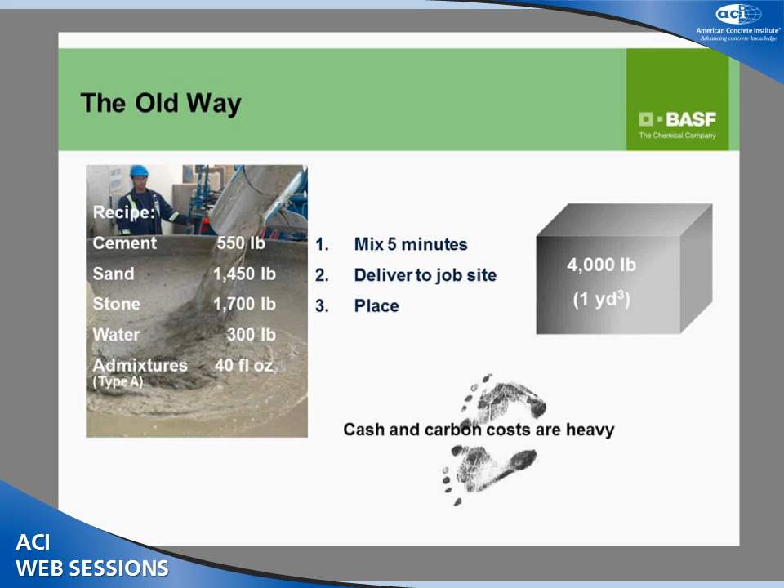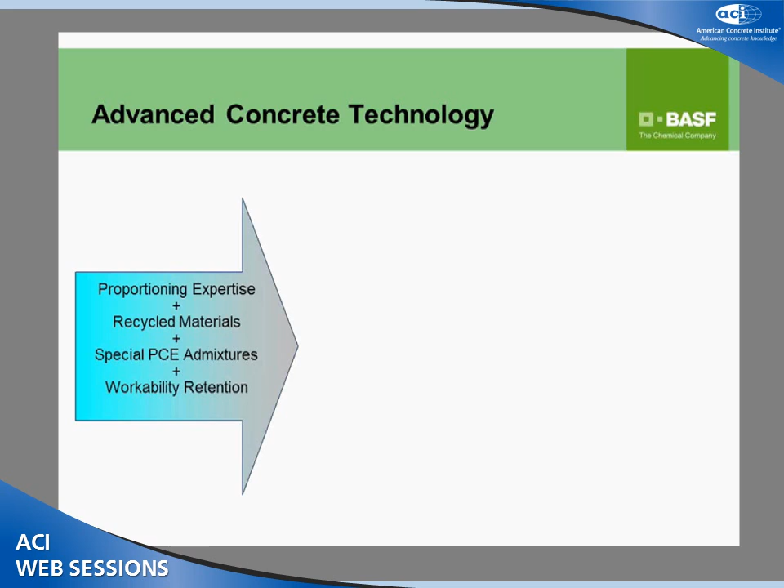The only problem is, if we follow that recipe, there's a cash and a carbon, or environmental, cost to doing that. There are advanced concrete technologies that are moving us to more sophisticated and lower ecological impact mix designs. We're able to do this through proportioning expertise, the use of different types of recycled materials than we've used in the past, special PCE admixtures, and workability retention.

It's depicted on this slide: if the world we used to live in was concrete that was expensive to produce but had low to moderate durability, low to moderate workability, or high porosity, somewhere in this world we can move up into this area—lower cost concrete with better workability, better durability, and lower porosity. The thought of doing that in the past was a little bit unthinkable.

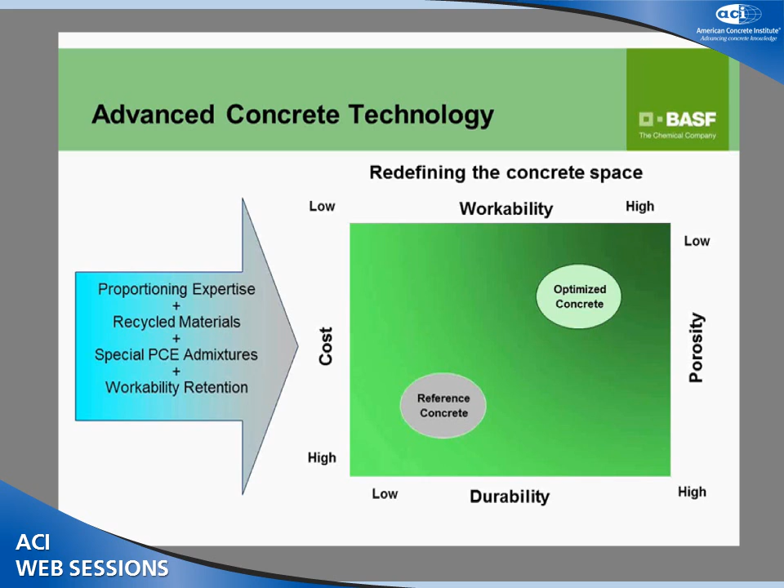How can we make concrete better and cheaper, and in the end also with a lower environmental impact? So ERA started to talk about this a little bit—the replacement of large amounts of Portland cement.

With different ingredients, whether they're things we're typically used to replacing Portland cement with, like fly ash and slag, or some more exotic things and combinations, like out-of-spec silica fume, metakaolin, cement kiln dust, or even limestone fines or aggregate fines.

Mixes can be proportioned using all of those ingredients, and it isn't one magic recipe. There isn't a recipe that fits all.

When we're looking at designing mixes for performance and low environmental impact, you have to look at the mixes individually, and you have to determine what's the type of mix, what's the workability and engineering properties, and then look at what region we're in and what materials are available.

Is there fly ash? Is there metakaolin? Is there silica fume? Is there limestone fines, for instance? Then determine the reactivity of these materials and match them with the right novel chemistry.

I think Era did a great job this morning talking about some of the novel chemistries and the molecules of these PCEs. But to match the mix design with the reactivity levels of the recycled materials with the right chemicals, and then use expertise in gradations and custom software and proportioning expertise to come up with specific optimized concrete mix designs where cash and carbon costs are minimized.

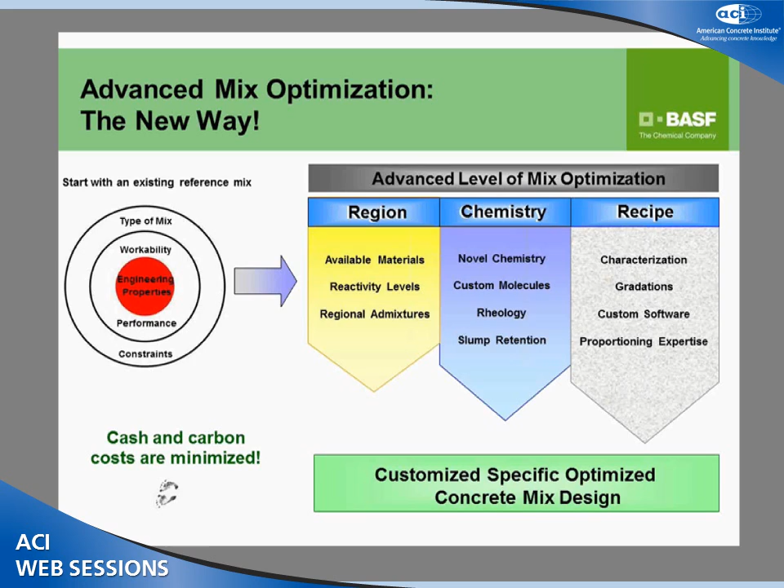So you start to hear about 50, 60, 70% replacement of the Portland cement with combinations of these different materials.

A question comes to mind: we know how to measure performance of concrete, right? We know how to measure compressive strength, modulus of elasticity, and setting time, so we can make sure these mixes containing high amounts of recycled material perform. But how are we sure, and how do we measure the environmental impact of these different concrete mix designs?

When doing so, you really need to take into account three different pillars. The first is economy: is it sustainably less expensive? Second is ecology: is it a lower environmental impact? And third is social responsibility: is it just the right thing to do? When measuring the environmental impact of concrete, you should look at all three of these pillars.

We always hear about buzzwords in the industry, in our society - lower CO2 emissions, lower carbon footprint. We hear those all the time, but I don't think we always understand what that means.

In this case, an analogy is a more fuel-efficient car. If you make a car lighter, more aerodynamic, lower rolling resistance, add a battery-assisted hybrid, and lower air conditioning requirements - that sounds great, right? Let's party, it's a great achievement.

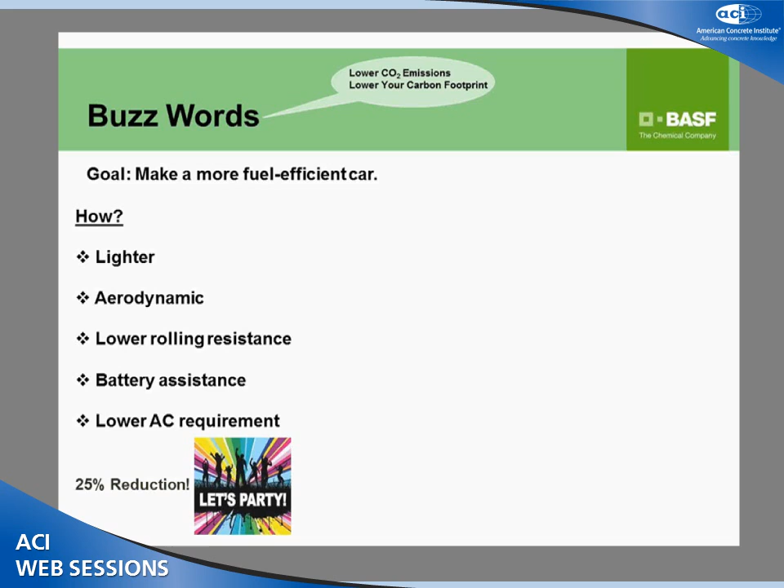But really, you need to go back - and this is just to make a point related to concrete - and look at what have you really accomplished. If it's lighter because of certain plastics, or aerodynamic because of different alloy systems or innovative rubbers, a supplemental engine, or reflective paint - those things should be considered in an environmental impact of a car.

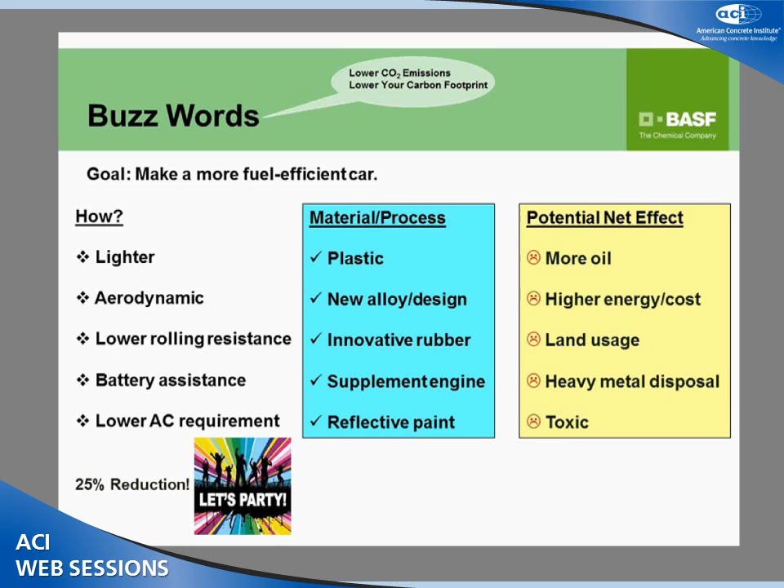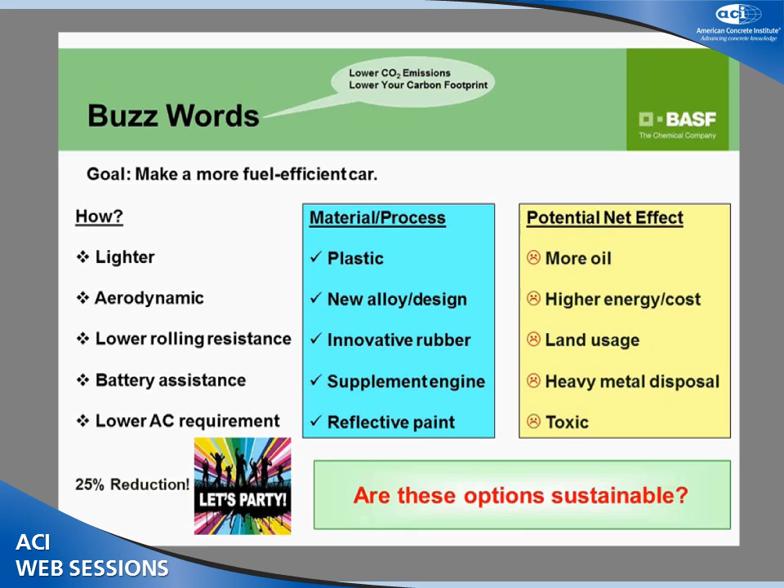So who knows? We're not saying this is the case, we're just saying you really don't know how much more environmentally sound this car is until you go back and quantify: is there more oil being used because of the plastic? Is there higher energy because of the alloys? Right down the list - are we using land to mine the rubber, heavy metal disposal, or toxicity? The whole point is you can't tell on the surface whether something is environmentally sound or if these are a good sustainable choice.

So now the analogy moves towards concrete, and we keep hearing recurring themes: reduce cement content, more supplemental cementitious materials, and use recycled concrete. In these mixes, which would be more sustainable? By sustainable we mean lower impact on the environment, a good impact on sustainable construction.

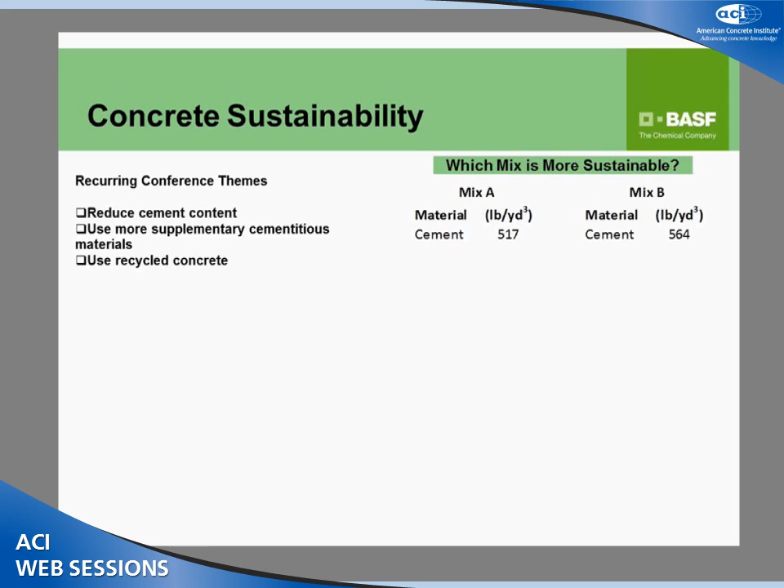So if you had a mix with 517 pounds of cement or 564, most people say well, more cement, that one is probably less sustainable. Well, maybe that is and maybe it isn't. Maybe it depends on how far the cement is coming. If the cement is coming in from China, maybe that mix isn't more environmental.

The author goes through several examples of mixes that you would think you'd know have a lower environmental impact just by the experience we've had so far. For instance, one would say, well, of course a fly ash mix, reducing the cement content, would be more environmentally friendly. Well, that's only the case if fly ash is readily available and you're not shipping it in all the way across the country, and you're not taking into consideration all of those aspects.

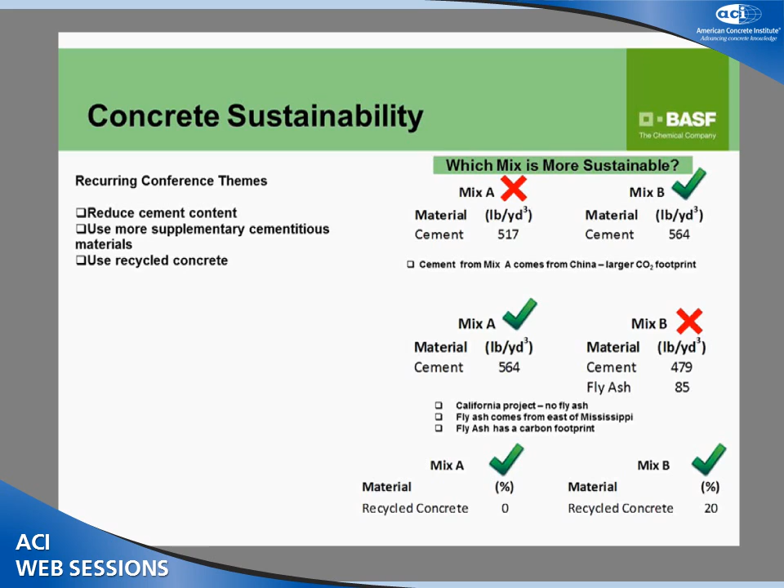And it's the same with recycled concrete - maybe some has no recycled concrete, some has 20%. It depends on the recycler efficiency and all that. So the point is, how does one know which one is more sustainable?

The reason you want to know it is because we want to be able to quantify the environmental impact of concrete. And everybody these days is talking about green - this is green, that's green, everything's green.

But one method of keeping from greenwashing the industry is through measurement, quantification. So the solution to possibly greenwashing is measuring - it's quantifying the environmental impact of our concrete. And there are eco-efficiency analysis methods available where that can be done. So let's talk about eco-efficiency analysis.

Eco-efficiency analysis is a life cycle methodology for comparing the ecological and economic influences of an alternative. You compare one or several alternatives to some type of reference. It could be a product, like baby diapers or concrete, curing compounds versus steam curing, or technologies, like automobiles versus motorcycles. There are methodologies that help us define how to do some of these things through ISO, NSF, and TÜV.

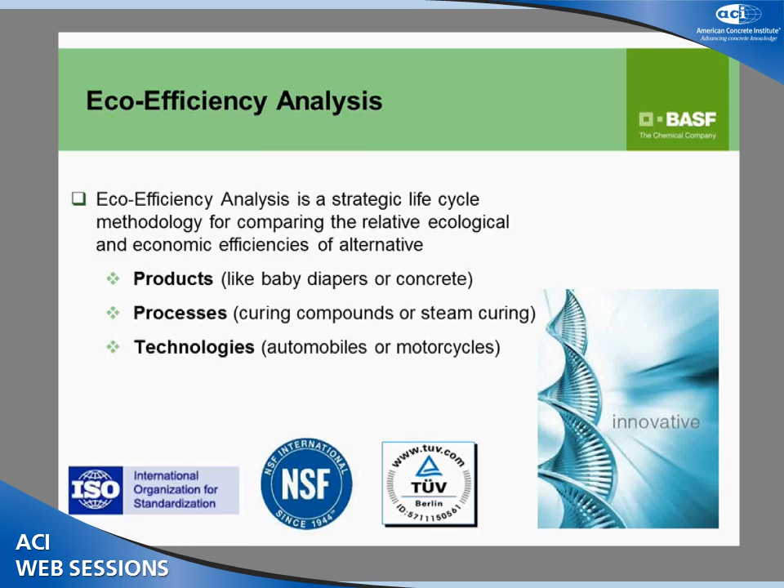There is an NSF protocol, P352, for validation and verification of eco-efficiency analysis. It does a few things. One, it considers the methodology. It describes the methodology for developing an evaluation at the product level, so again it could be concrete or diapers, describing how to follow that.

It relies on life cycle analysis standards developed by ISO. Life cycle analysis, in this case, is taking all of the environmental burden of the different ingredients through the whole life cycle of the creation of a product. I'll show you that for concrete in a minute.

This NSF protocol is divided into two parts. The first is validation of a methodology, so it describes how to do the methodology, but they will also verify actual studies. If somebody went to this NSF protocol, they could read about how to do an eco-efficiency analysis for concrete and create one if they wanted to. And if somebody did create one, they can also then get NSF to verify the actual specific study.

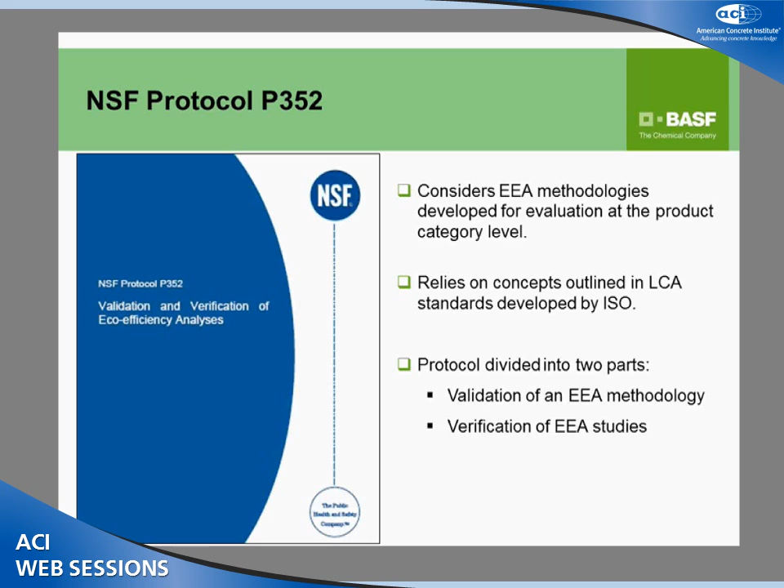When developing that eco-efficiency analysis using the NSF protocol, there's a process: establishing the study goals, defining the functional unit and alternatives. The unit's concrete, and the alternatives will be described. Establish system boundaries - is it going to measure transportation or not? Those types of boundaries.

Then it will determine the economic life cycle segments and calculate costs, or determine the environmental inventories of all the ingredients in the concrete, then quantify the burden and calculate it back, so you get an environmental economic impact of the different concrete alternatives, and you get an eco-efficiency portfolio that includes social and relevance factors.

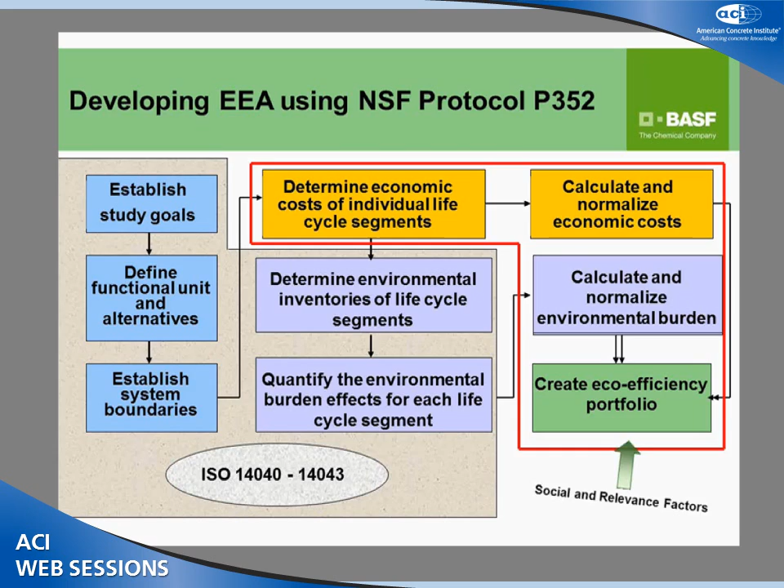Let's talk more specifically about an eco-efficiency analysis. The one being described here is an interactive computer program. It gathers data from different vendors, industry associations, government databases, and contracted consultants, and evaluates the environmental and economic impact of concrete ingredients based on the input.

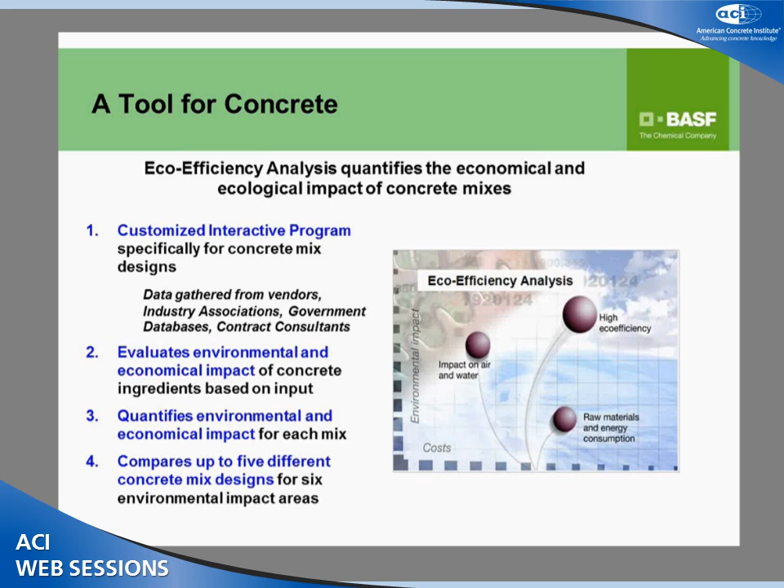You put in your reference mix, then you put in up to four different alternative mix designs, and it will quantify the environmental and economic impact for each mix compared to the reference mix. It'll compare up to five different mix designs for six different impact areas.

For instance, they analyze these six different impact areas, including consumption of energy, which we need to do. Second is emissions - not just air emissions, but also water emissions and solid emissions. And not only air emissions in terms of CO2, but air emissions in terms of global warming potential, ozone depletion potential, photochemical ozone creation potential, and acidification potential. Remember these, because I'm going to use the acronyms for them going forward.

The EEAs can also take into account toxicity potential - the effect of these materials on human health in terms of toxicity. The second is risk potential - how dangerous are these materials in terms of accidents or occupational disease? I'll show you in a minute.

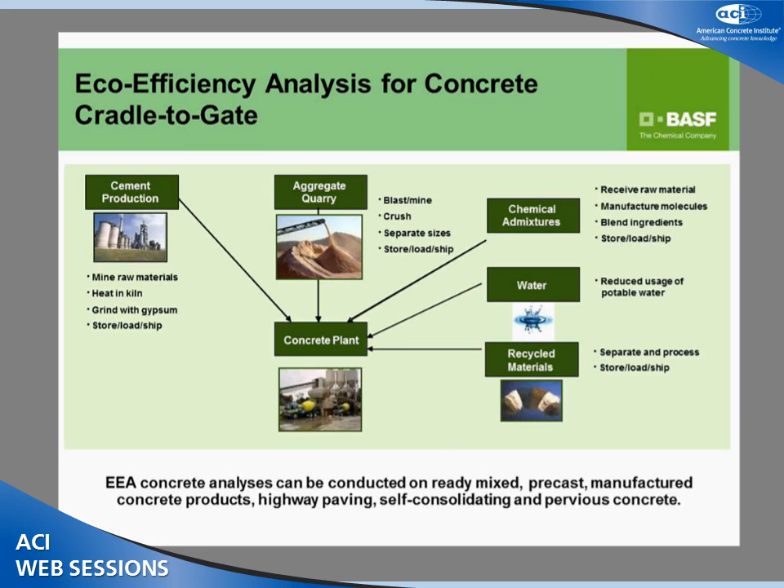So how these EEAs work is that there's data input. The producer's plant and project information is put into the computer, the volume of concrete is entered - you want to know that because you can do an eco-efficiency analysis on a plant if there's a certain amount of volume out of a plant, or you can do an eco-efficiency on a project. Then you want to include your raw material costs, your mix design information, your transportation distances - where are all the ingredients coming from - and then the computer does an environmental profile, sums the raw materials, does a calculation, and out comes a custom report.

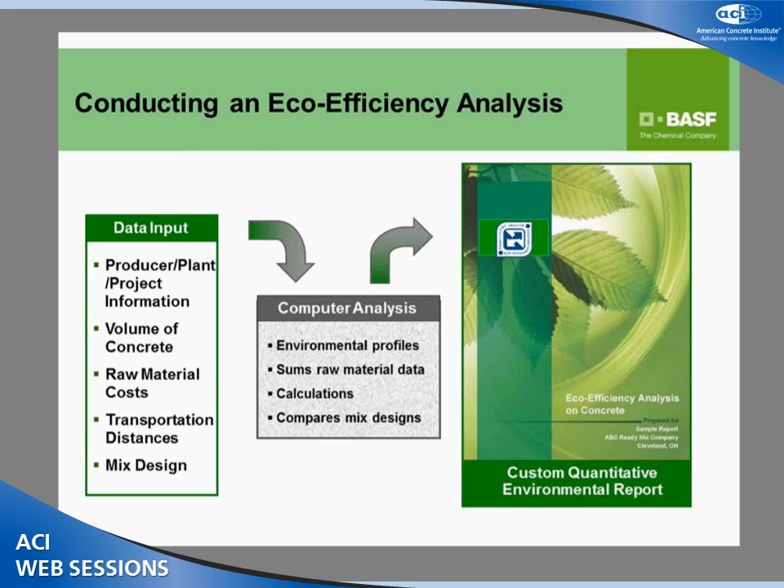And in the case here, it's about a 22-page report. Again, basically what it does is a couple things - it does an environmental impact analysis in those 6 areas that I keep mentioning, and here they are.

The first thing the program will do is give you a quick fingerprint of the alternatives. So this would be an example - let's see, 1, 2, 3, 4 - there's 4, 5 lines up there. So it's one reference with 4 alternatives compared to it. This is a quick fingerprint, a quick snapshot of the results, and the closer the lines are normalized to 0, the lower the impact. So in this case, whatever these mixes might be, this would be the highest risk potential - all the other alternatives would be lower.

And then in this case for toxicity potential, some of them are actually lower, and the red and the yellow are about the same. Sometimes the toxicity potential could be outside of the reference - it could be worse. So it gives you a quick view.

But also, another quick view is an EEA profile, where all of these ecological impacts are normalized into one number using societal measurements to do that. And then it's compared to the cost of the mix, the actual cost of the mix. So you can compare these different reference mixes and alternatives in terms of environmental impact and in terms of cost, with the better for both being farther up to the upper right.

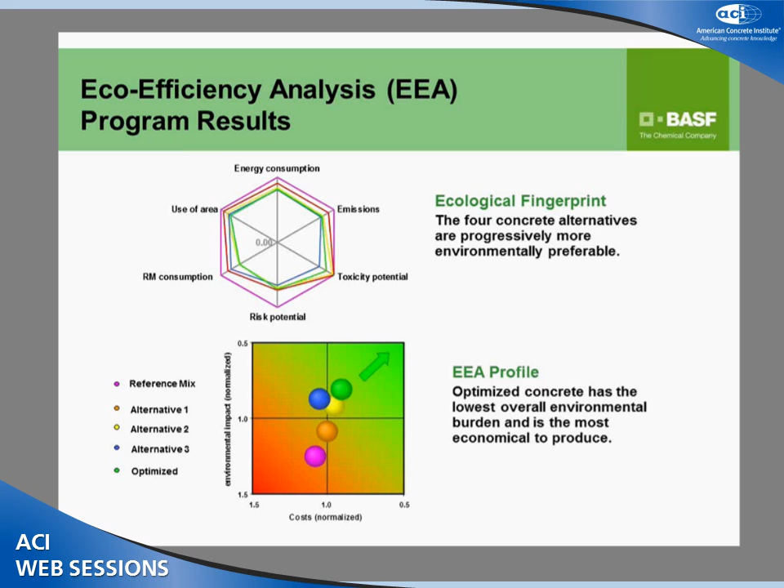Now, these are just broad views of the results, but for each one of the environmental impact areas, there's also a very in-depth study that shows an actual quantification and a practical equivalent for your different mixes compared to your reference. I'll show you an example in a minute, but I wanted to let you know this is just a quick snapshot - there's the actual quantity and practical equivalent for each one of these impact areas.

And so what I want to use as an example to demonstrate that is the World Trade Center. Before I go on, I want to encourage everybody in the room to stay for the entire session, because Kaz Bagnacki is going to be doing a very interesting and much more in-depth discussion on the World Trade Center and another project. All I want to talk about is some environmental impact analysis that we did on this project. I encourage you to stay for Kaz's presentation. If you have any questions about the World Trade Center, he would absolutely want to be the man you'd want to ask. In this case, there was a couple of different mix designs used for the columns.

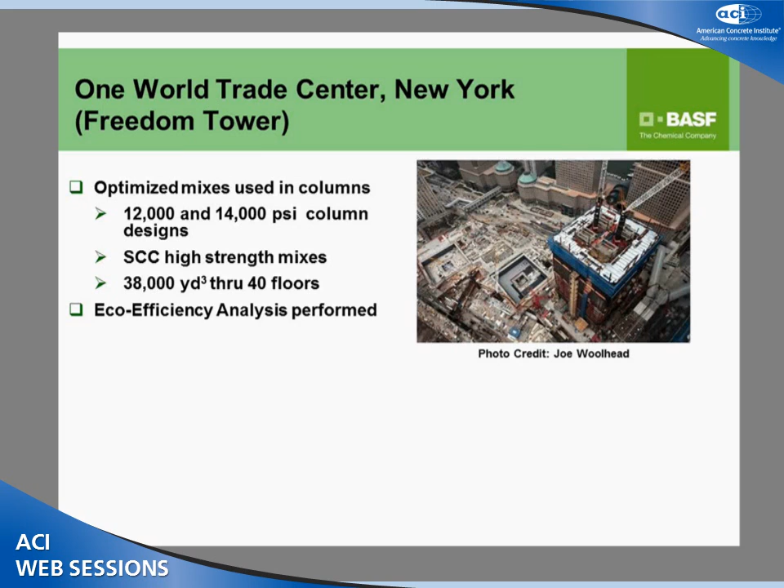It's a 12,000 and a 14,000 PSI column. It was SCC, and it's much higher now. But through the 40th floor, there was 38,000 yards - I guess it ends up being somewhere around 100 floors or something. And I know it's not called the Freedom Tower anymore, it's Tower 1. So, an eco-efficiency analysis was conducted on Tower 1 partially the way through construction, and that's the data that's presented here.

Let me take a minute on this graph. As I said earlier, there are 6 different impact areas, and there's quantifications for each one. So simply what was put into the eco-efficiency analysis: a reference mix assuming all Portland cement was used. This would have been the environmental impact of that mix design. The actual mix design, which contained SCMs, had a much lower impact on the environment.

This is all, at this point, on a per cubic yard basis. For instance, the embodied energy to create that yard of concrete was 833 kilowatt hours for the reference mix, and 619 for the actual mix. So there was a savings in embodied energy of 26%.

You can go right down the columns. Raw material consumption, 20% savings. Fossil fuel consumption, 22% savings. Here's those air emissions I asked you to memorize. Global warming potential, 42% savings. POCP, which is smog, 7%. AP, acidification or acid rain, 40% savings. Water emissions, 15% savings. Solid waste, 16%. And land use, 4%.

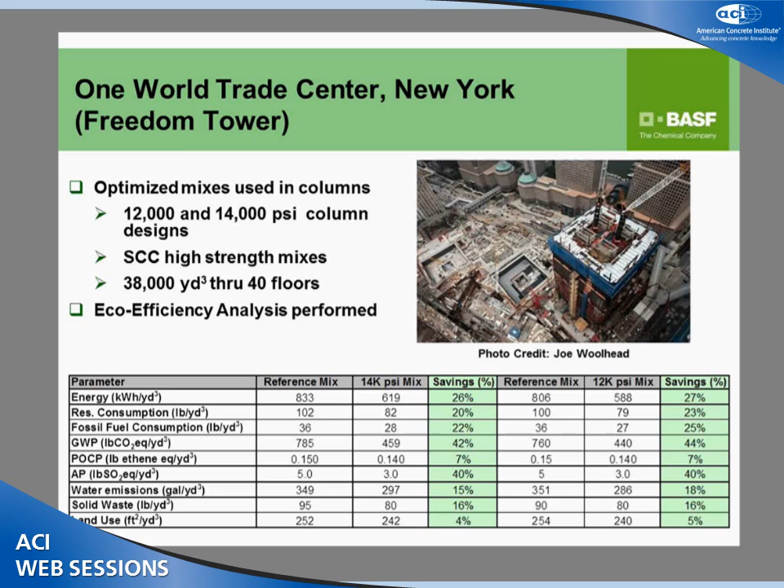The same type of analysis was then compared to the 12,000 PSI mixes. So you're seeing that with the actual design used in the mixes, there was quite a bit of savings per cubic yard of concrete in both cases. The natural next step would be to look at how many yards of concrete were used. Again, in this case it wasn't the whole structure—it was a partial way through the construction of Tower 1.

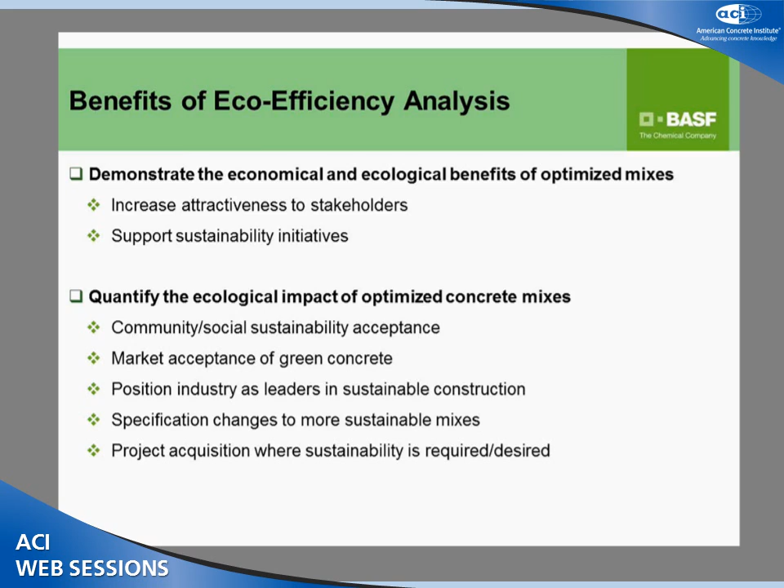So in closing, these eco-efficiency analyses are good for internal use, to see how well we're doing with sustainability initiatives, but most importantly to quantify the ecological impact of optimized concrete mixes for community and market acceptance of our recycled green concrete, to help position concrete as a leader in sustainable construction, and to drive spec changes that get projects to use some of our sustainable and innovative concrete technologies. These programs are much more than CO2, and much more than LEED points—it's all about full life cycle analysis of the environmental impact of our concrete.